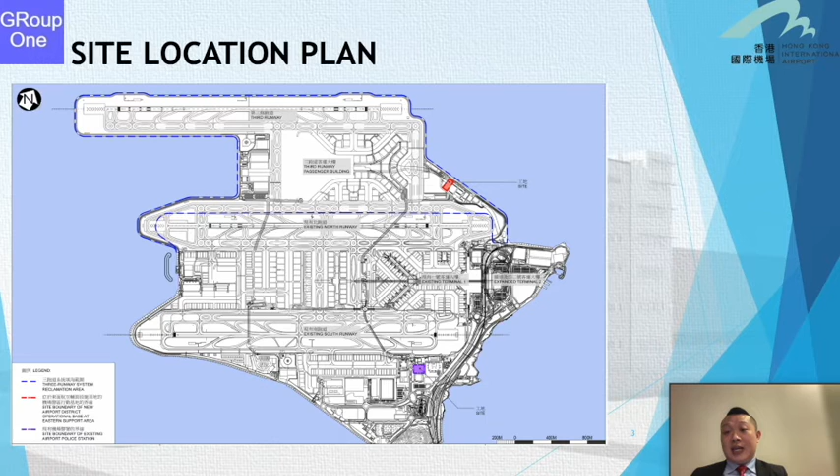I will introduce the project. Here you can see the project is located at the 3rd runway of Hong Kong Airport. Here is the location map.

To meet the growing air traffic demand and to maintain competitiveness among different cities in the world, we need to build a new police operations center.

We are Group 1 construction company headquartered in Hong Kong. We specialize in various infrastructure projects. We have a well-reputed history and a well-structured organization, including the BIM teams and robotic teams.

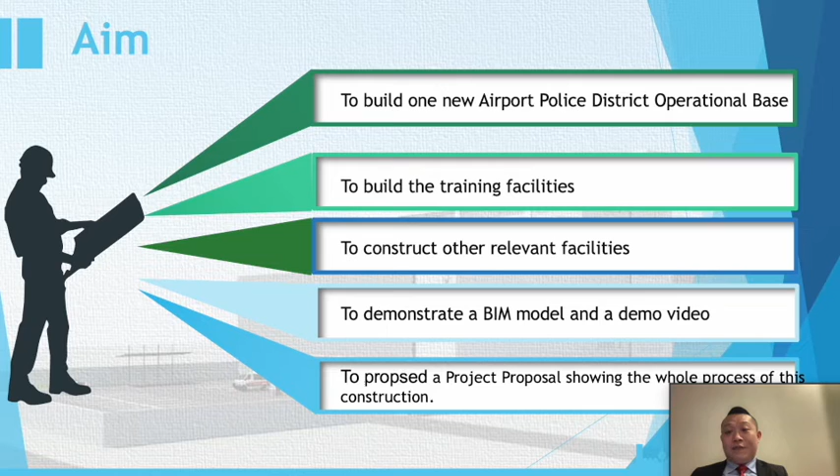Here is the aim of our project, which has 5 parts. And Marco will talk about the literature review.

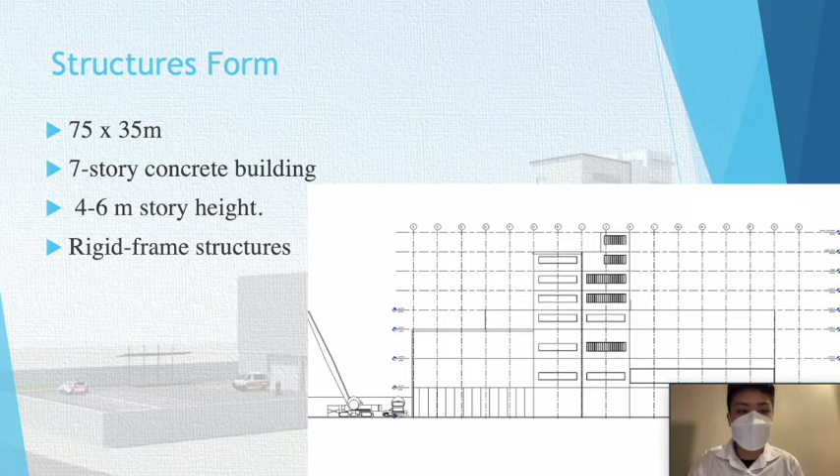Hello everyone, let me talk about the literature review. For the construction form, we will suggest constructing a 7-story building. The construction method will be suggested using the rigid frame structure.

The schedule management is assigning dates to project activity, also including matching equipment, material and labor resources to project work. Also, our analysis method would be the critical path method.

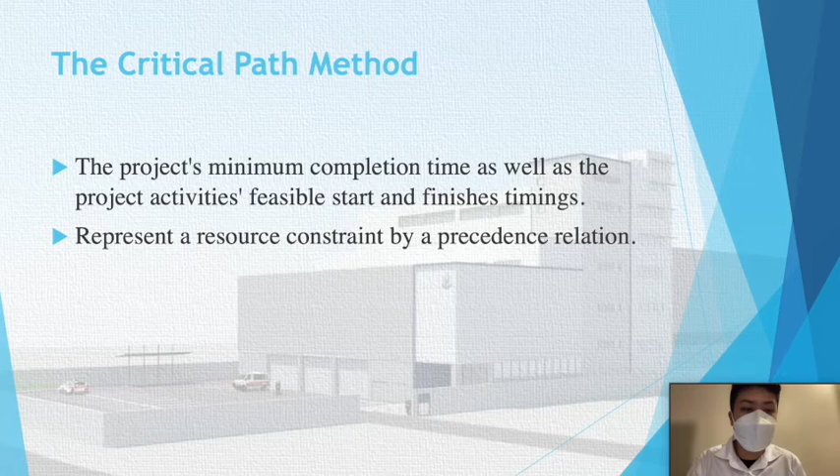Let's talk about the critical path method. This method determines the project's minimum completion time as well as the project activity's start and finish time. Also, it can represent resources constrained by precedence relation.

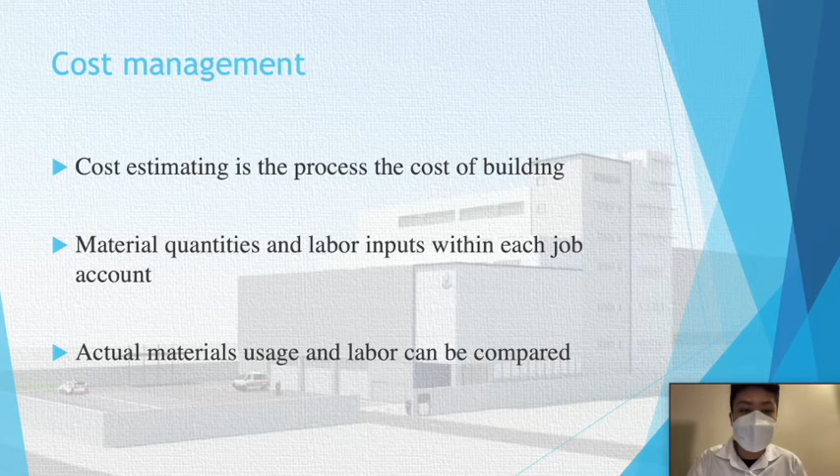Cost estimation is the process of estimating the cost of the building. Also, the information on material quantity and labor input within each job account is also typically retained in the project budget. In this project, BIM will be used to build up a 3D model to demonstrate the construction details.

and use the video to present the construction sequence. According to the regulation of the Development Bureau in 2018, we must adopt BIM in the design and construction of the project if the project is more than $30 million.

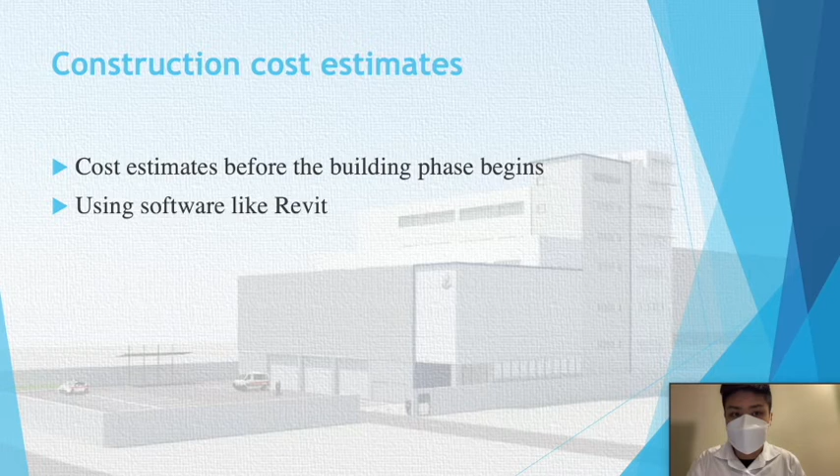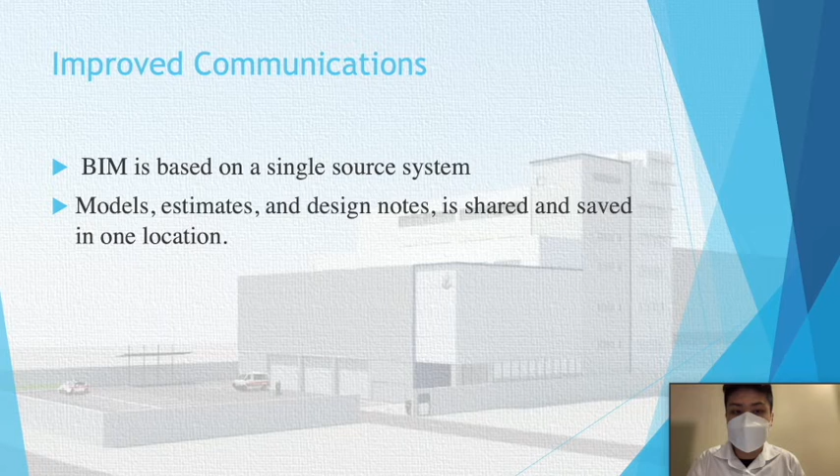Cost estimation can be done before the building phase begins using Revit with Microsoft Project. BIM is based on a single source system. All important information such as model, estimate, and design notes is shared and saved in one location.

Using BIM, engineers may estimate possible construction risks and mitigate them by modifying the design, so the safety of the construction may be better. Thank you very much.

Hi everyone, my name is Chun Hung. I'm going to introduce the methodology adopted in this project. First, an overview of the methodology. It mainly consists of 3 parts, which are the cost estimation, project scheduling, and BIM model.

For the cost estimation, cost in terms of employment, material, and machines, we will be using information from the Census and Statistics Department of Hong Kong, the Hong Kong Construction Industry Employee General Union, and HKEX News.

For the project scheduling, the work breakdown structure will be referred to the PMBOK guide of 2001. The critical path method can be referred to the methods proposed by Atin and Lubis in 2019. Then the resource leveling can be referred to the methods proposed by Dewey in 2015.

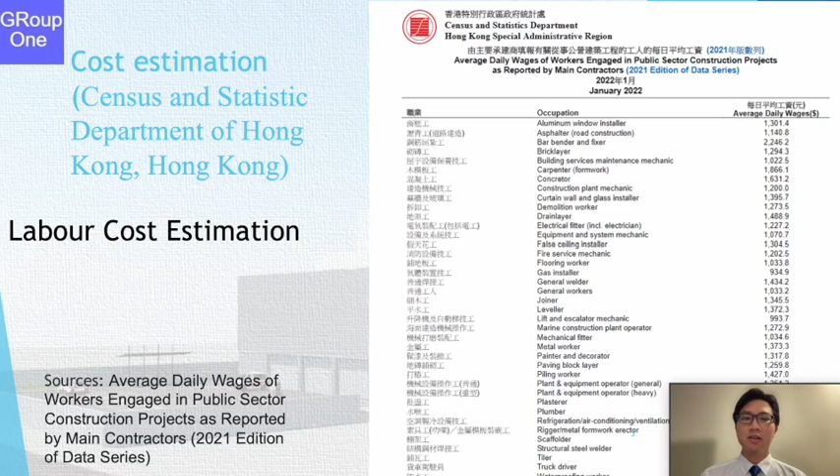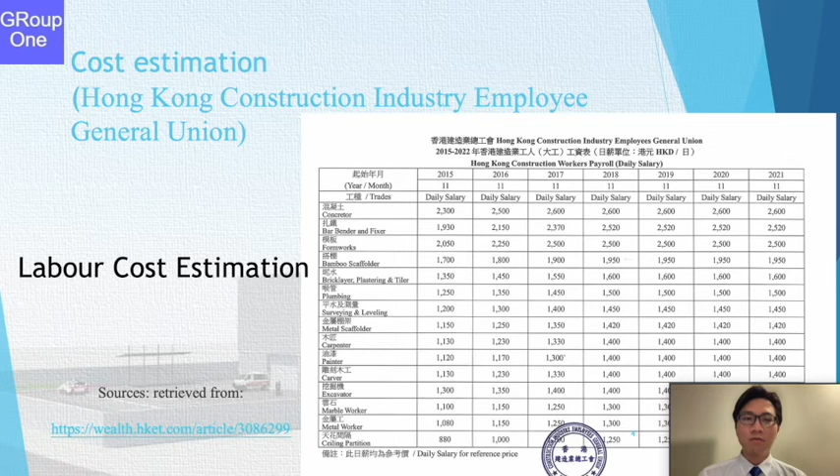So for this slide, this labor cost estimation report is extracted from the Census and Statistics Department of Hong Kong. This slide also shows the labor cost estimation, which is extracted from the Hong Kong Construction Industry Employee General Union.

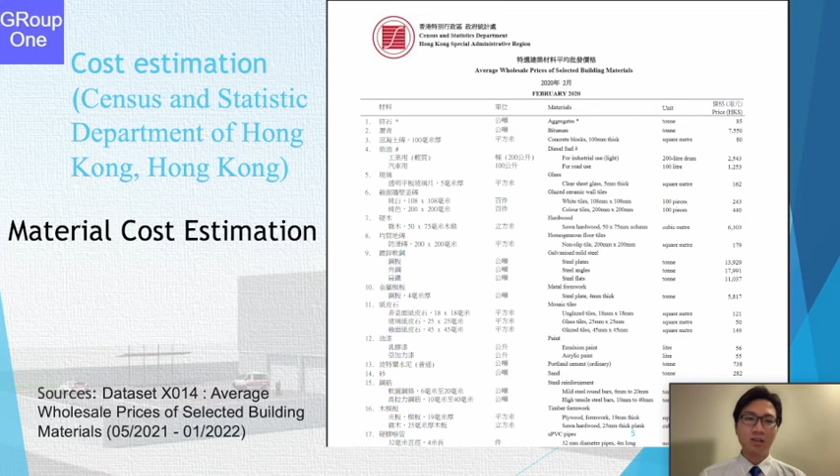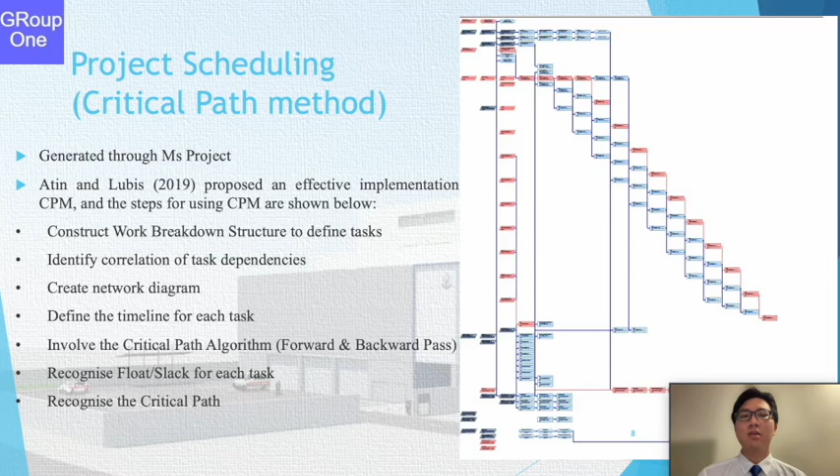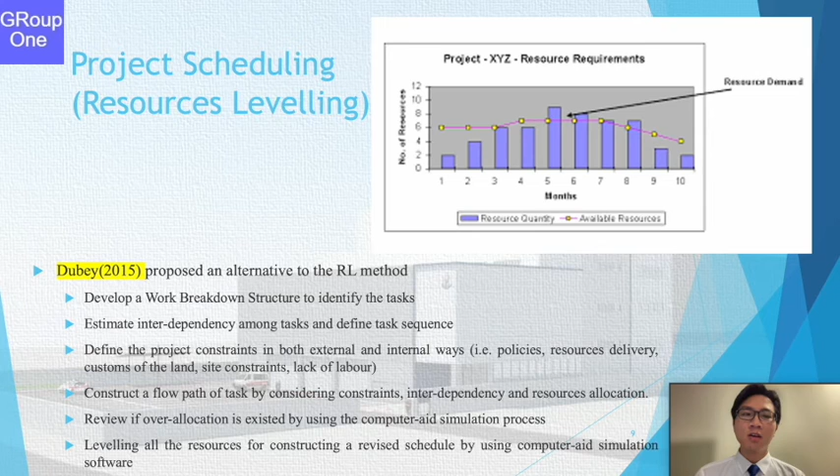This shows the resource leveling, which uses the methods proposed by Dubey in 2015. And those are the steps for the Dubey methods.

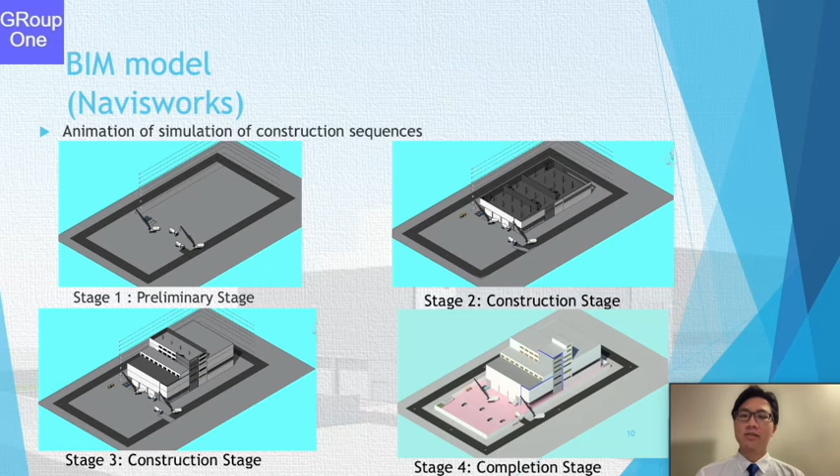This is the BIM model, and we divided the construction stage into 4 stages. Stage 1 is the preliminary stage, stages 2 and 3 are the construction stages, and the final stage is the completion stage.

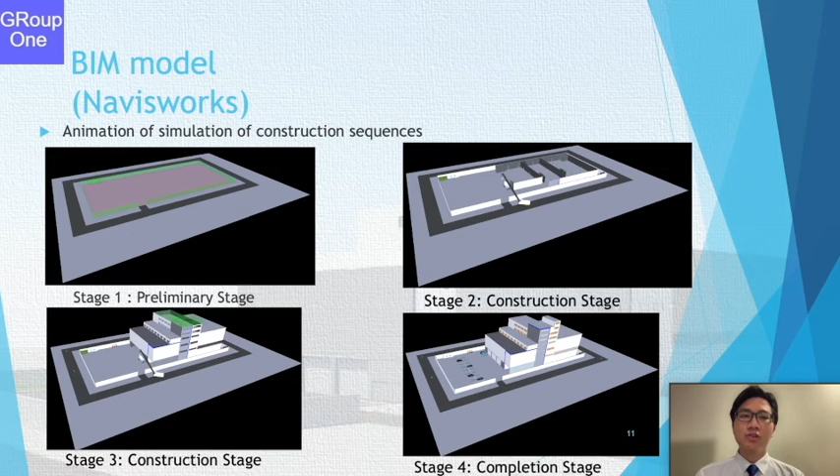Also, for the Navisworks model, it is used to simulate the construction sequence by animation. The animation is generated automatically, so this is the animation simulating the construction sequence. Let's have a look and see whether it can be played.

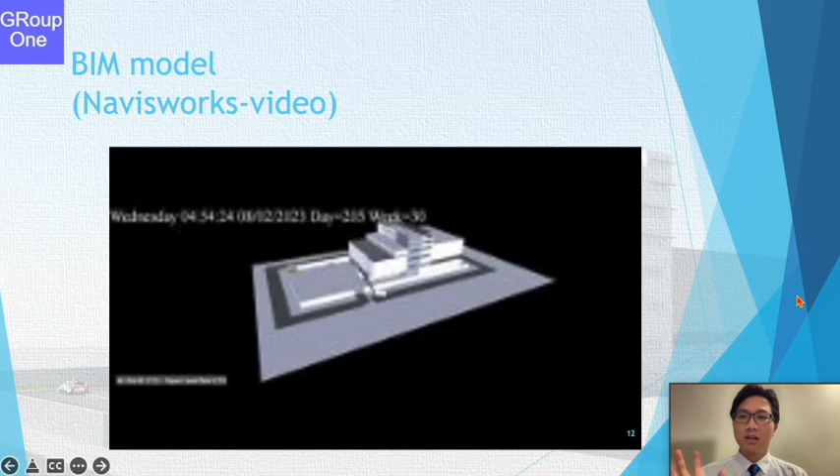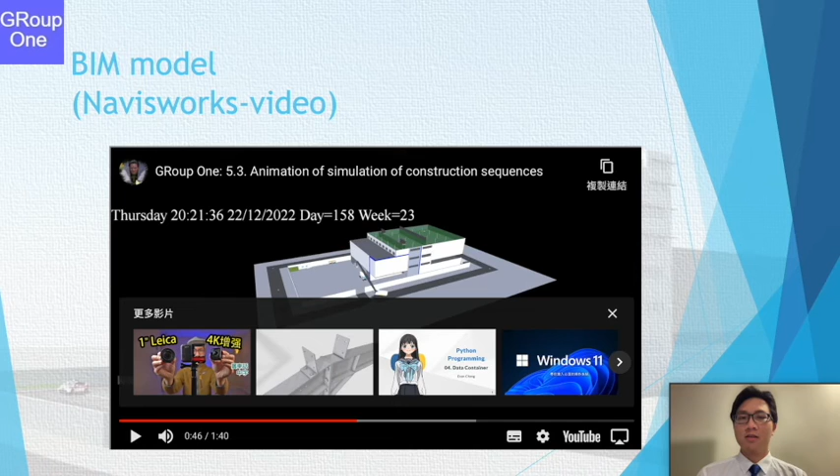So that's it, this video shows the construction sequence. For the details, please refer to our group project. So that's it, thank you.

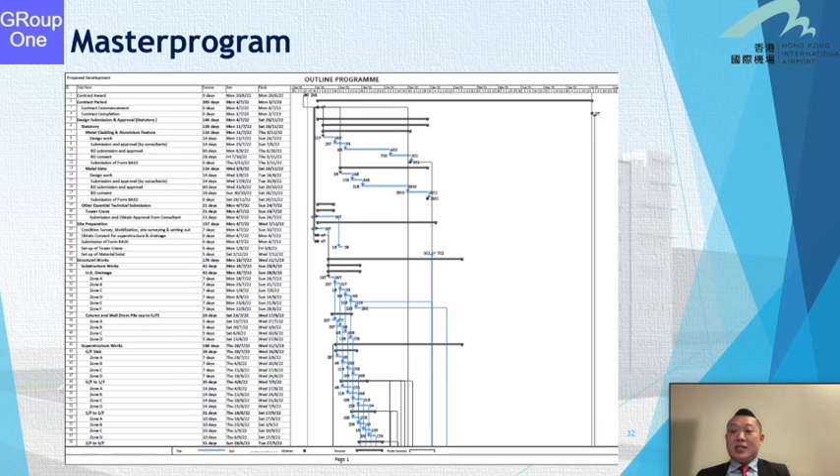Heung Man will talk about another part. Now I will talk about the cash flow of our project.

The cost is composed as follows: we first input the resource costs provided from our company into Microsoft Project, then assign the resources to every single task, and the program automatically generates the cost for every milestone.

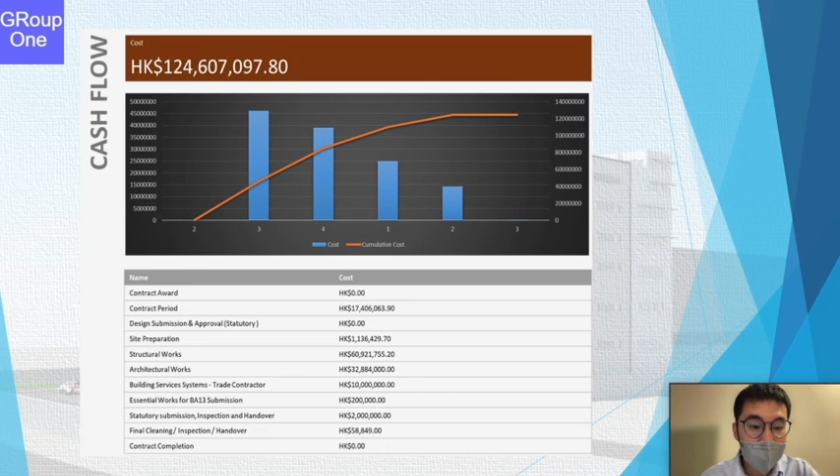There are labor costs, material costs, and outsourcing costs. The labor cost is composed of the...

employment of site workers, site agents, and professionals, and the material cost is mainly composed of the concrete cost and the reinforcement cost.

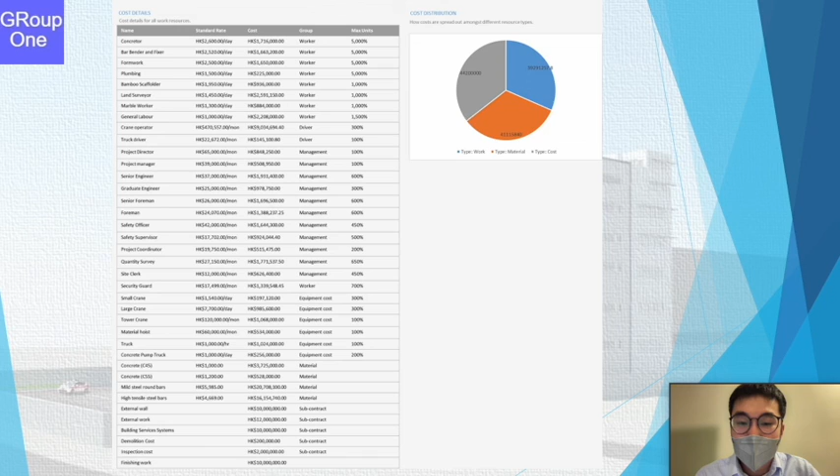The third part is the outsourcing cost. Since our company is mainly working on the superstructure, the architecture and inspection work will be outsourced to other subcontractors.

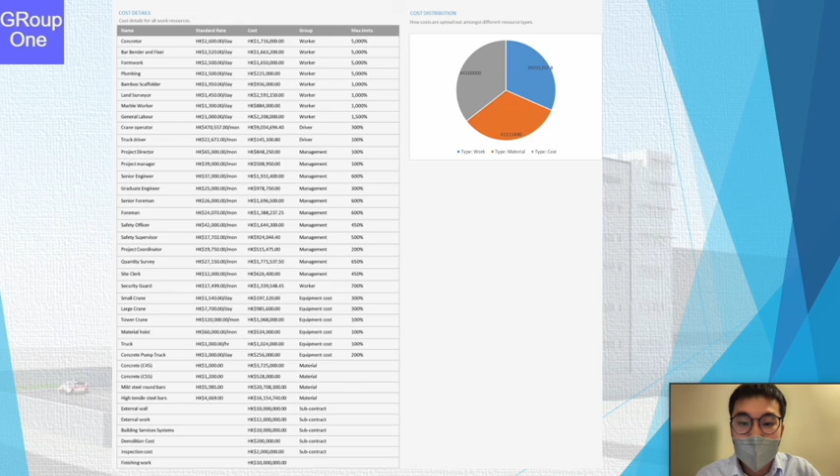This is the resource work availability report. Like other contractors, we handle various projects simultaneously, so the usage of resources is constrained to avoid over-assignment in a single project.

However, we will provide some tolerance for cases where we need to accelerate the construction progress. Thank you, Herman. Let's talk about the conclusion.

To conclude, the cost of our project is estimated at around 120 million Hong Kong dollars, and this project is to be completed after 1 year, or 365 days.

We will use a thorough monitoring scheme such as Microsoft Project, as mentioned before, to monitor the whole construction progress so that we can build all the facilities required on schedule and within cost.

At the same time, we will also build a BIM model and demo video to demonstrate our construction project, which you can see in our final report.

To conclude, this project can be built on schedule and within budget. Here's the reference. That's the end of our presentation, thank you very much.